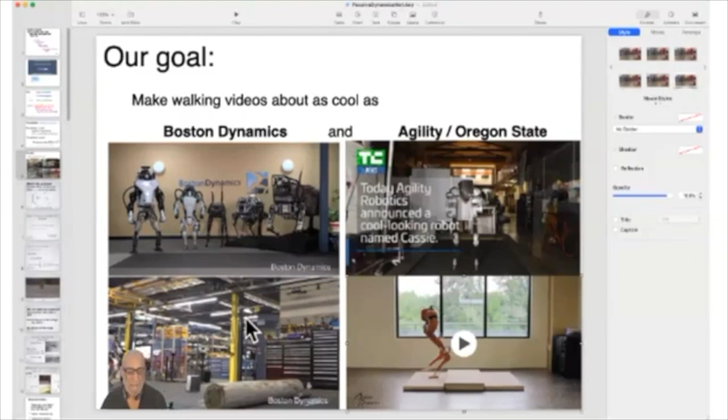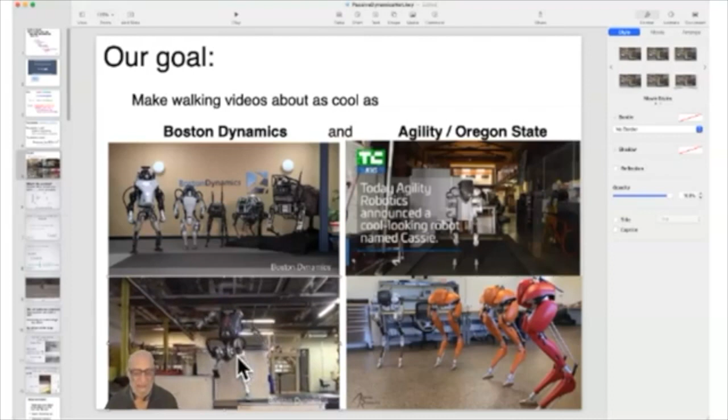Here's just another Boston Dynamics video. And I guess you could look at this and say, okay, the locomotion problem is solved, but these use so much energy, and also these tasks that take so much planning - they're kind of scripted. So we want to do better than that in some way.

And here's a way of trying to measure how we want to do: you plot on the axis how energy effective something is, which is the reciprocal of something called cost of transport. The cost of transport is how much energy you use divided by what you get - it's like the cost to benefit ratio. The cost is like gallons of gas, but if you want to be specific about energy, it's like joules of energy, and the benefit is how much weight you move, how much distance - weight times distance has units of energy. Then you take the reciprocal of that, so it's miles per gallon instead of gallons per mile.

On the other hand, if you have a measure of performance, which could be how fast it can move or how cool it looks or how much people go 'ah' when they look at it, say humans are pretty good, and the new robots from Boston Dynamics or Agility Robotics are not quite human-like, and the Cornell robots, which I'll show you, which we made, are not very good at all. So the idea is you want a really cool robot that either goes fast or looks like a human or balances really well, and you'd like a really energy effective robot. Right now, you can kind of get one or the other, and we'd like to get up here, and I'm going to tell you today about a way to get here.

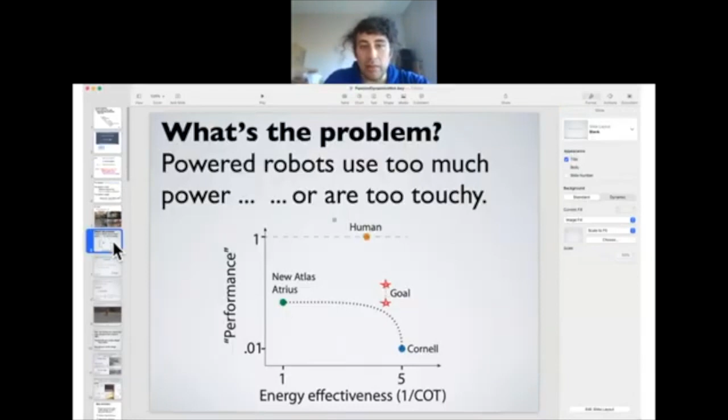I had one question on the previous slide, on the performance versus energy effectiveness, one over cost of transport. Is it true? Is it really that flat, the curve there? Is this flat up here, you mean? No, this is just a random curve. So generically, this is what's called a Pareto front, where you're trying to optimize two things, and the generic shape for a Pareto front is a circle or an ellipse.

So just think of this as, there's always a trade-off. If you have some feature and you want to make it more efficient, you have to give up something. You make a curve as good as you can in one dimension, and then if you say, no, I also want to do this, you've got to give up something on this side. So there's always a curve, and it tends to be sort of circular. The shape of the curve is actually task dependent, so depending on the task, you're gonna have a different curve. This curve in particular really has no meaning because I didn't give an objective definition of this thing called performance. I'm just trying to show there's a trade-off, and obviously humans are more capable than any robots we've made, and the robots we made at Cornell are less capable than the robots people made at other places.

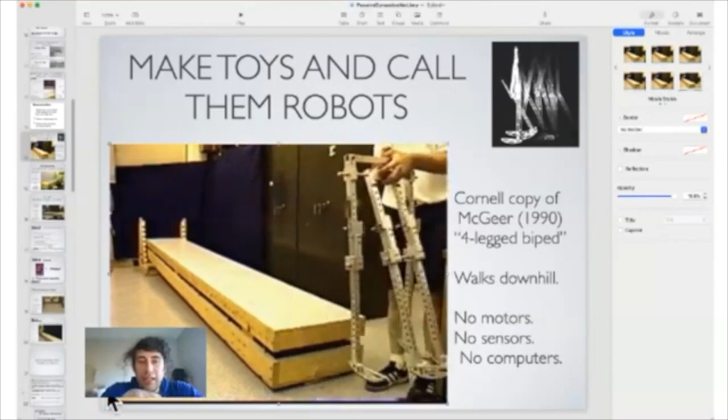So my question was, there is a bar there which connects the four legs, right? So how is that done? Is there some sort of freedom there? I don't understand how that is done.

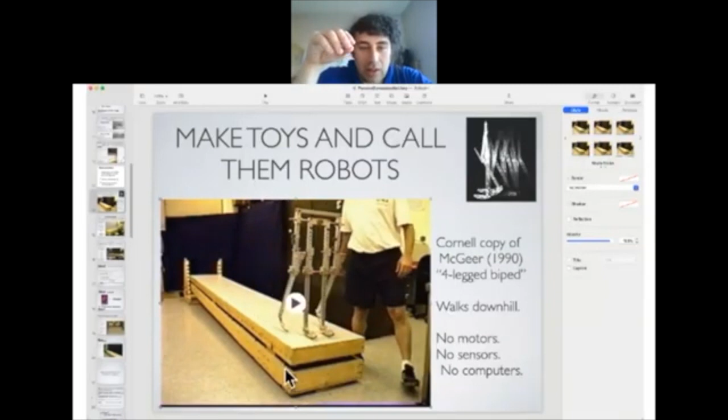Okay, so conceptually, what you're supposed to look at when you see this is two legs. You're only supposed to look at, say, the left leg and the right leg, and this leg has a thigh and a calf, and this leg has a thigh and a calf, and that's all we want. But we live in a 3-dimensional world, so if we want to take this 2-dimensional concept and put it in 3D, we have to keep it from falling over sideways.

So what happens is this thigh is just connected mechanically all the way over to this thigh. So this is one piece of metal all the way over here. So the left and right thighs have to move together. And then this is the other leg. Sorry, this is not the left and right — this is the right thigh and its mirror image, and here's the left thigh and its mirror image, and they're one piece of metal like this.

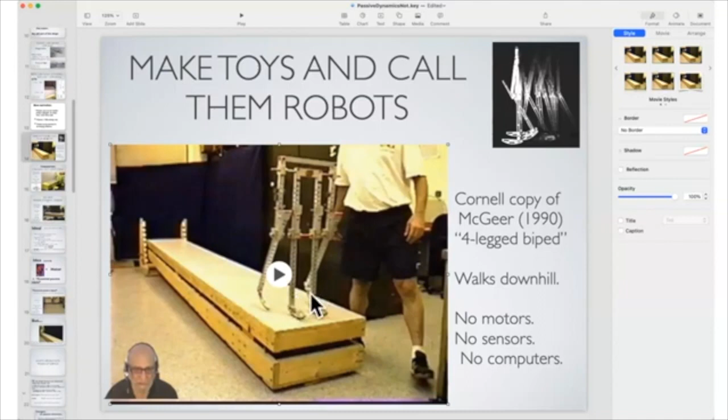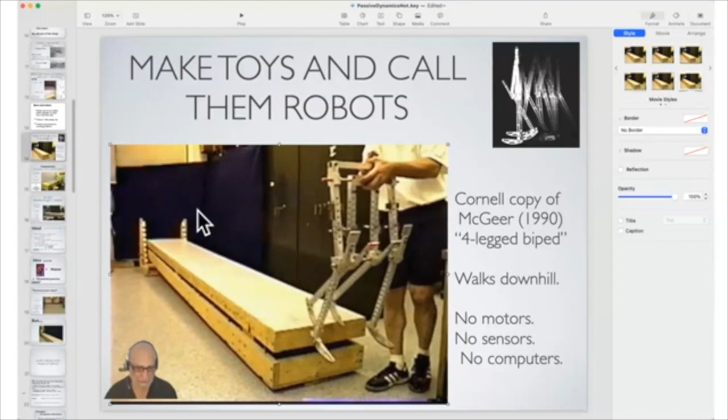Then we have the two calves, which you could think of as independent. Sometimes we would put a piece of metal across here and sometimes not. This piece of metal actually is independent of the other one, but somehow they entrain with each other because they're both seeing the same thing. So the middle two legs — these two calves are tied together. The outer ones are not, but they just entrain in the motion because of some kind of dynamics that we did not study. Does that address your question?

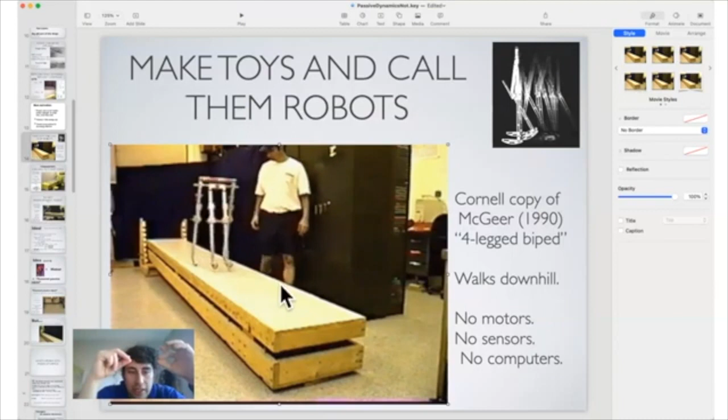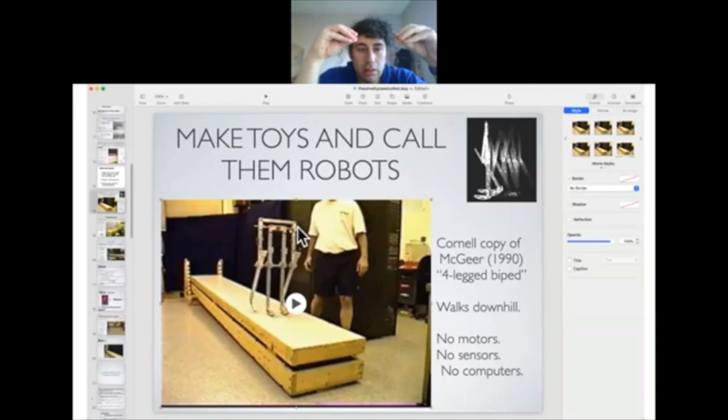Yeah, just in part. The other part is like that horizontal bar which connects the two central legs with the two external legs — is it fixed to any of the legs? This bar here? Exactly. Okay, it's only fixed to keep it from falling out. This is just a bearing. So this is free to rotate on that bearing, all of them are free to rotate on the bearing.

But actually it doesn't matter — I mean, that's equivalent to it being fixed on the outer two and the inner two swing, or fixed on the inner one and the outer one swings, or it's not fixed on any of them and it just can't slide out. So this is just a hinge, it's just an axle that passes through the four legs, but the legs can rotate — all the legs can rotate around that.

Okay, good, thank you. So now we wanted to figure out one interesting thing about this, which is this thing is stable, right? It doesn't fall down, and you'd say, well, why doesn't it fall down? One way to think of why it doesn't fall down is that once per step it visits this configuration where the legs are all spread out and it's stable. It can stand there stably. So maybe this thing inherits its dynamic stability from its static stability.

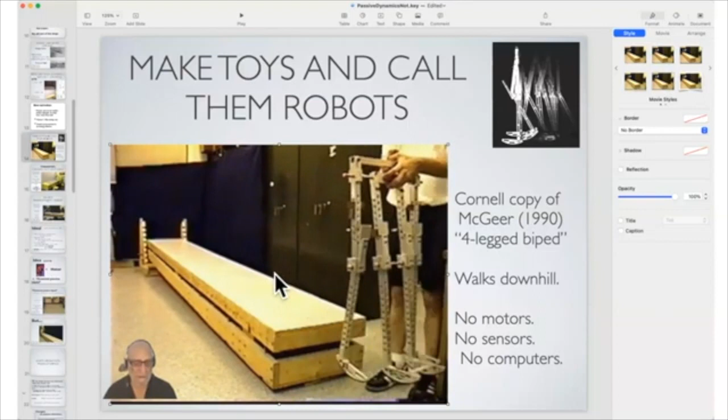So just freeze it like that — no, try to freeze it just better. It can stand like that. So, if I have any kind of object and I put it on a flat surface — say I put my computer mouse on my iPad — it's stable, right? There's no question it's not going to fall over.

Now, if I just jiggle this around and do a complete detailed analysis, this is a dynamical system. It's like a boring dynamical system, but it's a dynamical system. I could say, oh look, the equations are really complicated and it still doesn't fall over. But it's not too convincing because obviously it's not falling over. It's stable, and I don't have to change it that much.

If I take my computer speaker, the one that's not working for me, and put it up here like this, it's got this feature - can I turn off that thing that makes my background disappear? Is that in my option list? Let's see if I go to background preview. That's what I like. None - is that the hidden background? Blur - I just want to do it just the way I am. Show me the way I am. Blur. Don't want to, none. There. Should be apply. Now apply. It didn't work. Apply, didn't work. None. Apply it.

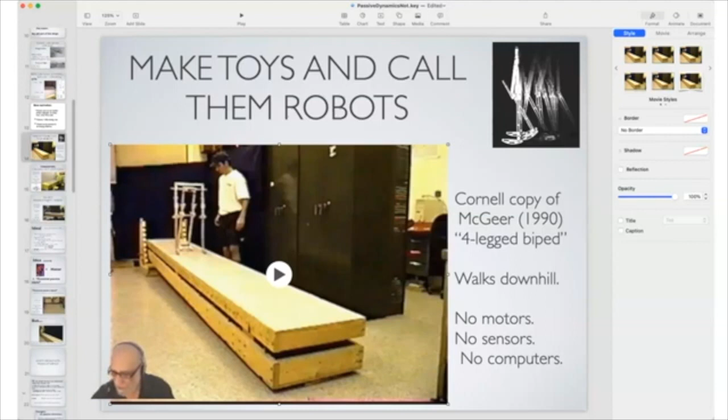Okay, so the question - are these robots, these walking robots, and what do I mean by these walking robots? I mean this one by McGeer, or this toy - are they stable because they've got big flat feet, or are they stable because they're like a bicycle and something about the motion makes them stable? It's not quite a mathematical question because it's hard to know. But we thought, well, one way we could answer that question is, can we make a robot that's like a bicycle that when it's not moving, it doesn't balance?

So here's this thing - it's got these round feet, and the center of mass is above the center of curvature of these feet. If you just put this down, it doesn't matter whether the legs are spread or not, it falls over. But it walks, and the computer agrees that it walks. So it shows in principle that this walking thing can be something like the bicycle thing. With a bicycle you try to give credit to spinning parts or so on, but there's no spinning parts here - it's only about the motion that makes it stable.

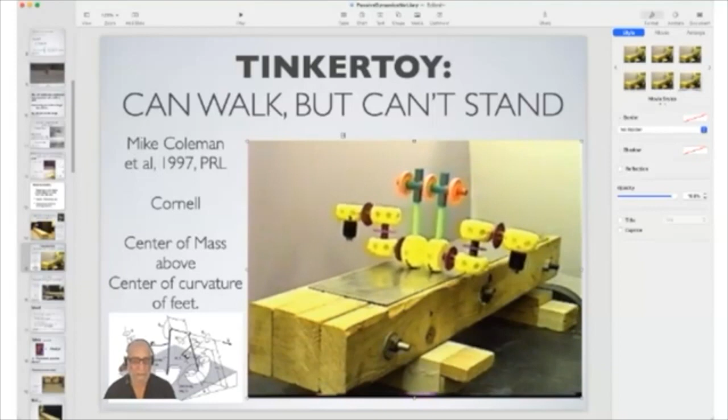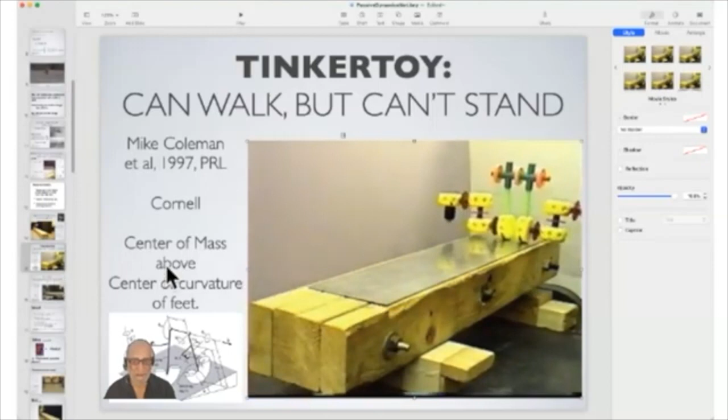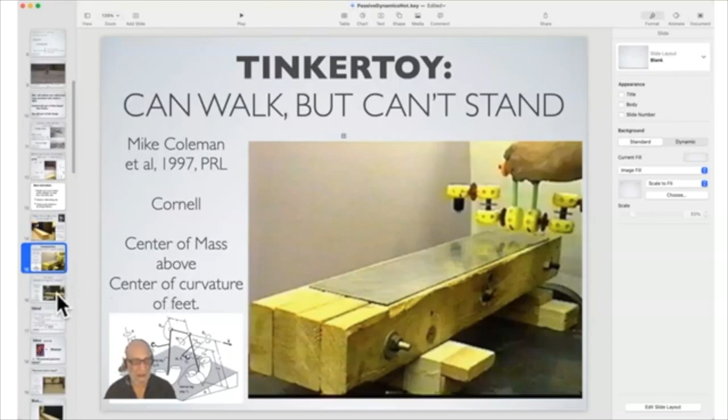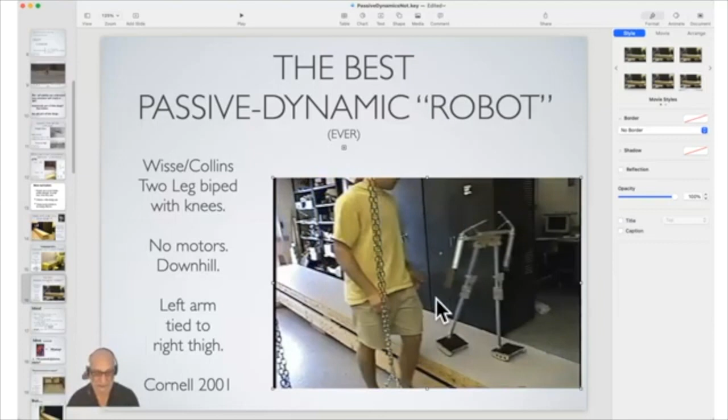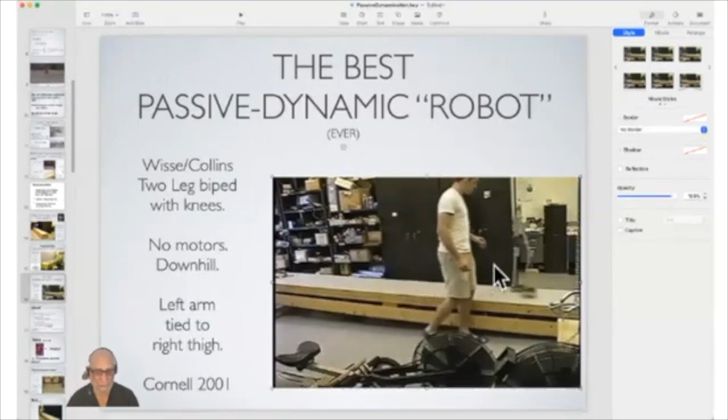So how was the shape of the feet in front? Okay, so because we wanted this to work in 3 dimensions, not 2 dimensions, you have to keep the center of pressure inside the foot, or the foot capsizes. So this actually walks back and forth, left and right, and the bottom of the feet have little curves here, and these two curves are not the same as each other. They're for the purpose of guiding the center of mass, sort of an S-shaped curve here.

And then we say, well, we don't want the heel strike to be a big problem, so there's a soft, compliant heel. So even if it doesn't land just flat, it doesn't get a funny kick to the side.

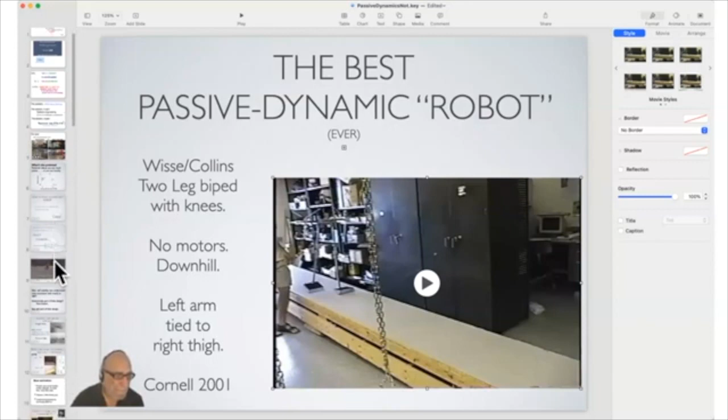And actually, we read the patent for this - let's just see if I can find it here. We've got gliders, we got toys, we've got this thing. The patent for this toy talked about the shape of the feet, and it talks about that you have to shape them so the center of mass goes like in an S-shaped curve down the ramp. Okay, does that address your question?

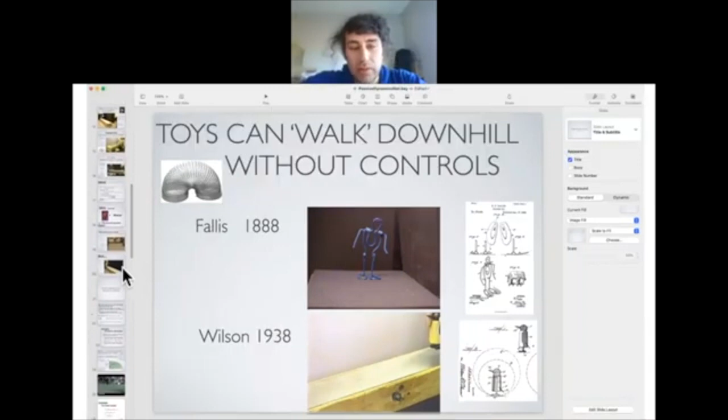The other question is: we have a lot of flexibility at the hips, well, okay, we have some flexibility at the hips, right? But these robots don't have flexibility at the hips, correct? This robot does not have flexibility at the hips. That is correct.

They only have one degree of freedom at the hips, which is a sagittal swing. They have no adduction like a sideways kick, and they have no twist about an axis. That's true for all the robots I've shown you so far, and it's true for all the robots I'm going to show you too. It's something that for 3D robots we talked about a lot, and I think that's not really essential for pretty much most of walking.

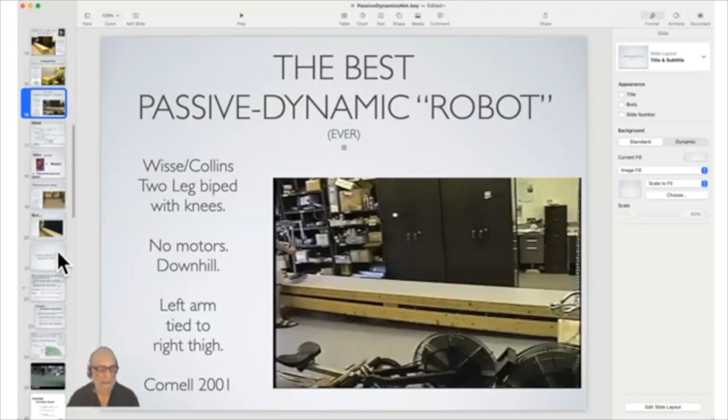Okay, so we've got this thing that works pretty well, and we say, okay, let's take an idea. This is what inspired Tad McGeer to make his first downhill robot. Let's make robots that are like planes or toys that are powered by gravity. Let's make them work. And then, since you're doing math and morphology, I can use math words and impress you, make it look like this is not just toys.

We calculate the dynamics of these things. It's hybrid dynamics with non-holonomic constraints. And we do a numerical search for limit cycles, and we find fixed points, which give us limit cycles. Then we make a Poincare map, evaluate it numerically, and get a matrix for that map, the Jacobian, and then we look at the eigenvalues of that Jacobian and try to get them all inside the unit circle. We tune the parameters until we get them inside the unit circle, and that's how we design those passive dynamic things. So there's math in there.

The people who made those original toys didn't do that math, but we did that math for McGeer's robot, and so did he. Okay, then now they're energy effective because the cost of transport is the slope in terms of our way of working.

And then if they were functioning going downhill, they should function when we add a motor, the same way the Wright brothers were. Now, how does that go? Well, to do precise mechanics reasoning, we would have to put a jet engine at the center of mass of each link. But we don't have to do it that precisely. Maybe we just have to add a little bit of energy, the same way that if you want to take a multi-degree of freedom system and bring it to a stop, you just put a dashpot anywhere and it will damp out all degrees of freedom. So maybe we just need to add a motor kind of anywhere, or kind of an okay place.

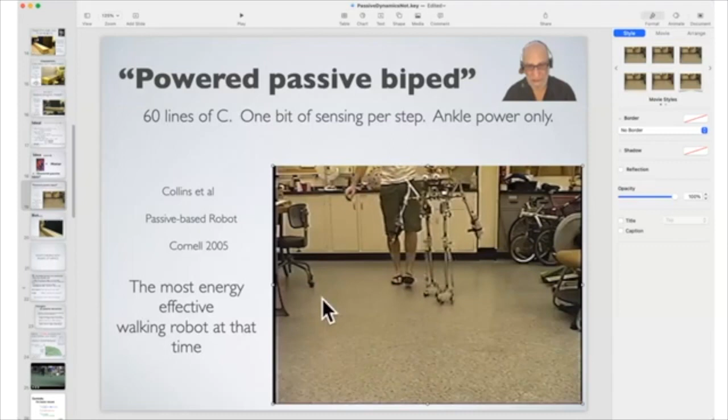It's not quite as evocative of a human gait as the passive one. The reason is that because we have to put all this hardware down here for the springs and the catch and release, the moment of inertia of the leg is bigger and the characteristic swing time is longer, so it's a little sluggish. The other one has lighter feet, it's a little more lively. But nonetheless, it's still pretty evocative of human gait, and it's basically a passive dynamic robot with a little bit of a motor in it.

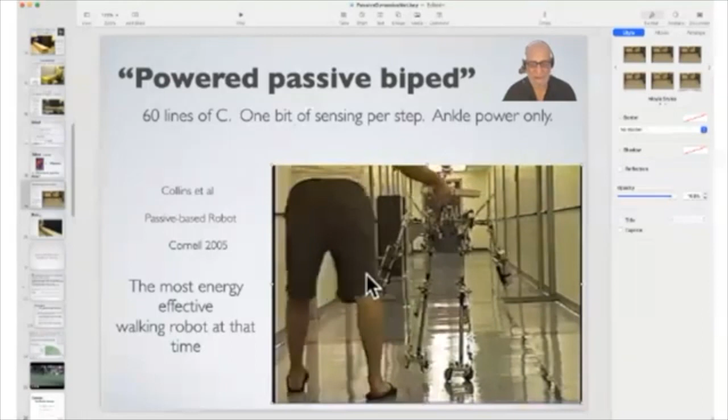So we made a big advertisement for this being a way to make robots, and I'd say we drank our own Kool-Aid, and a bunch of other people drank the Kool-Aid too.

So, do you have any questions about this robot or anything so far? Yes, please.

So how stable are these robots to perturbations? They'll move, and if you poke them in any given direction, how hard can you poke them?

Just in case anybody else is wondering, I did not pay him ahead of time to ask that question. Okay.

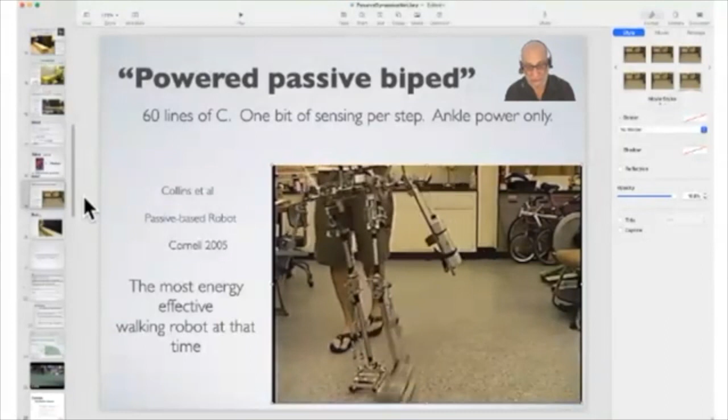So these robots are like incredibly reliable, and they work every time I show the video. Okay, but I don't show every video.

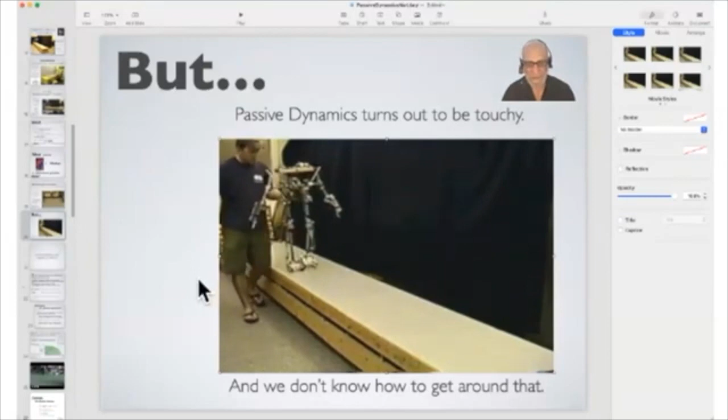So most of the videos are more like this one, maybe a little more extreme.

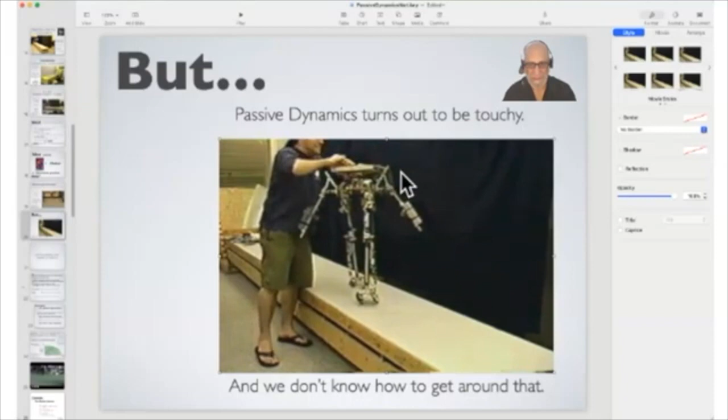This is the first time I showed this video in public. Somebody said, do you have robot videos of it falling down? And I had to look on my computer in front of everybody to search, because I didn't remember where it was. I just remembered the name of the video. You can see the smoke coming out of it over here. The name of the video was, oh fuck. I did this search in front of everybody.

So now I do the same embarrassment. I just say it. That's not spontaneous embarrassment.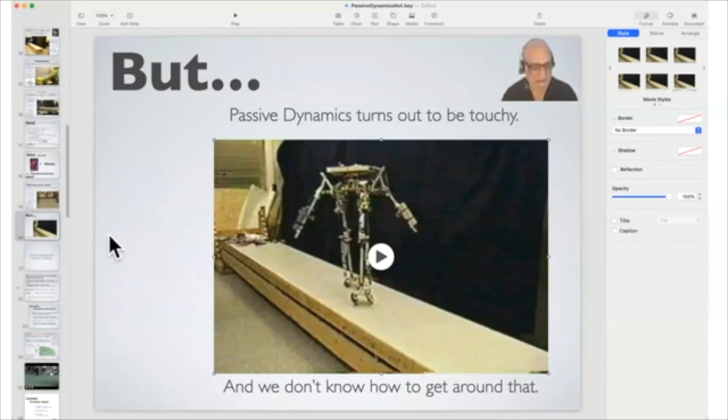So we've got hours of video of this robot falling down, and it's not very stable against perturbations. In fact, none of these robots are stable against perturbations. The bicycle's not stable against perturbations, and all the toys I showed you are not stable against perturbations. So all of these things, we get this periodic motion, and it's stable technically, meaning small perturbations die out, but the basin of attraction is not very big. We've done technical calculations on this, and I'll show a slide coming up where we quantify it.

So this was the thing. Everything was good. We were lying to ourselves and everybody else, because every single one of these robots is fussy.

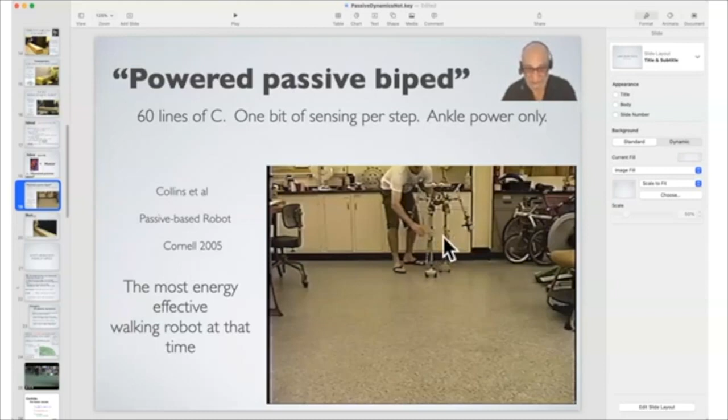This particular robot, we got in Science magazine and got lots of publicity, and I thought, okay great, they're going to have TV cameras. Steve spent a month at Cornell and he couldn't make it walk again. It never walked again after these videos I show. These are not representative videos, these are all the videos of this thing walking. And then you take any of these robots, like this one, it's really delicate. It has good days and bad days.

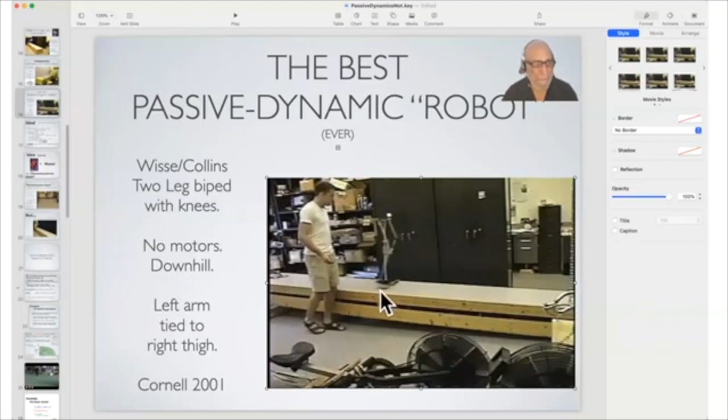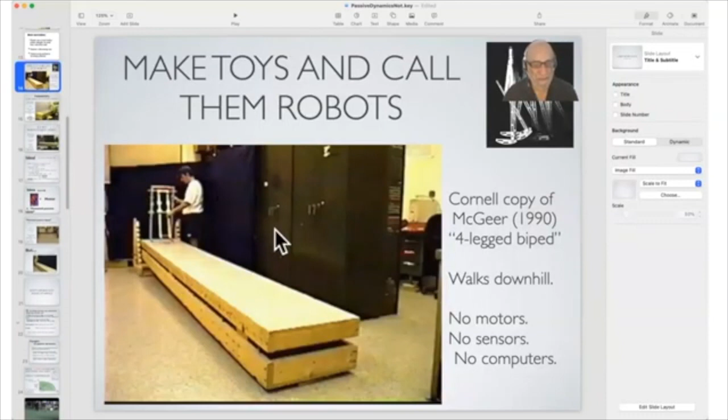This one, if you're around it for a while, you can make it walk every time. So it's a little bit robust, but it's not super robust. You have to learn how to use it.

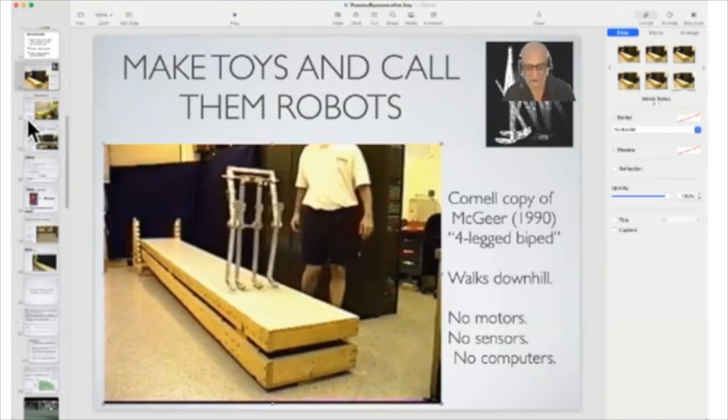This one, I've got another funny story about. This one also got some publicity, and a bunch of people saw it and saw that the research budget for this is $10 for the Tinker Toy set you can make this with. There was a bunch of 8th graders who set out to make this robot for their science project.

There's this girl who set out to make this, and it didn't work. I said, did you try adjusting the slope? Then it didn't work. I said, did you try playing with the weights here? It didn't work. Then I didn't hear from her for a while. After a few months I wrote back and asked how it worked. She said fantastic, I got first prize in the science fair. I said, first prize? Last time I talked to you it didn't work at all. She said, yeah, I never got it to work, but the judges were really impressed that I had an email correspondence with a real scientist.

So, I don't know, 5 or 10 people over the years have tried to make this, and maybe one has succeeded. It's incredibly fussy.

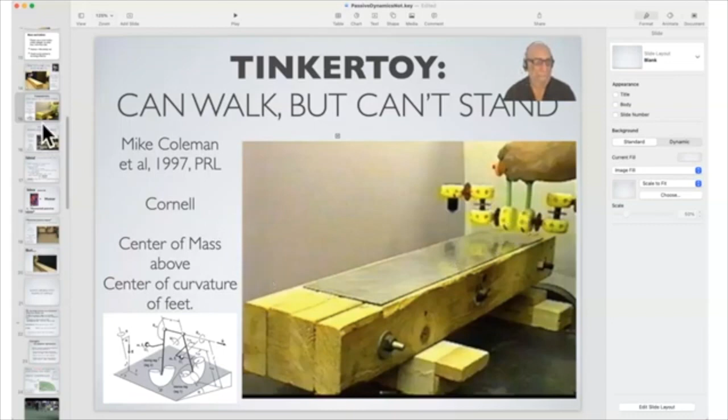These toys - this one works, but it'll typically wander off to the side. You have to have just the right slope. It's not the kind of thing most people have patience for. In the 40s and 50s you could do this, but you couldn't sell this toy really now because it's just sort of frustrating.

And then this one, as I said, it barely works. So what's the problem with passive dynamics? This whole thing I tried to sell you, which we sold pretty well - we got an article in Science Magazine saying this is a great way to make robots, and we got a lot of publicity. But there's a lot of things wrong with it.

So one thing - if you go back to the beginning and look at what the Wright brothers did, I literally misunderstood the Wright brothers in terms of the inspiration for this. Three years before their powered flight, they said the flight of the buzzard - a kind of bird that glides well - is a convincing demonstration of the value of skill and the partial needlessness of motors. So they were into gliders, but they had a different idea about them: it's possible to fly without motors, but not without knowledge and skill.

These guys were bicycle mechanics. I don't think they knew that bicycles could balance themselves - they knew you have a bicycle and you have to learn to balance it. They thought about flight the same way, that you have to learn how to balance the airplane. So when they built these gliders, they were not trying to make passively stable gliders that they'd later add motors to and get passively stable airplanes. They were trying to make airplanes that were unstable, like they thought bicycles were unstable, and then learn how to control them.

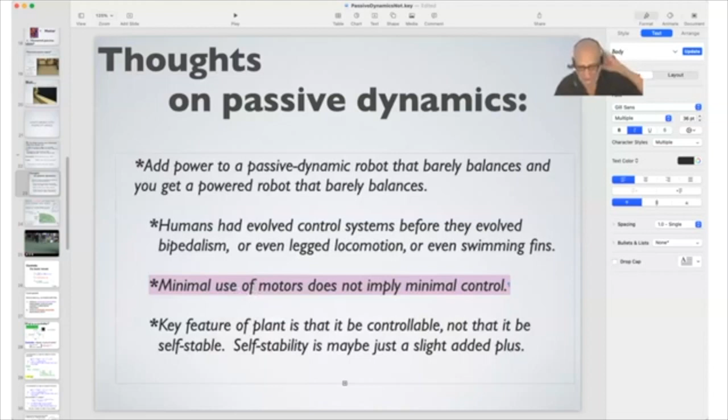It finds the way to not apply any torque.

I have a question about the mop example. So I have a weak memory of a page in a book by Arnold, which explains that in an inverted pendulum, it gets stabilized by some vertical oscillations at the bottom. I'm wondering if one can apply potentially useless oscillations at key points so that they take care of perturbations.

Okay, so first of all, my whole life is inverted pendulum. Everything I see is inverted pendulum. A bicycle's inverted pendulum, a toy is inverted pendulum, walking robots are inverted pendulum, people are inverted pendulum. Everything's inverted pendulum, so it's the right analogy. So how do you think about an inverted pendulum being balanced?

More or less, you have to get the center of mass over the support point. And how do you do that? Well, you move the support point sideways appropriately, and that's what we do on a bicycle by steering, or walking by stepping, or you somehow push the mass sideways at the top, which you can do. You have a little bit of control authority for doing that. For example, when you swing your arms, it causes a sideways reaction at your feet, which moves the center of mass sideways. And then there's this funny trick: if you shake the base up and down a lot, fast...

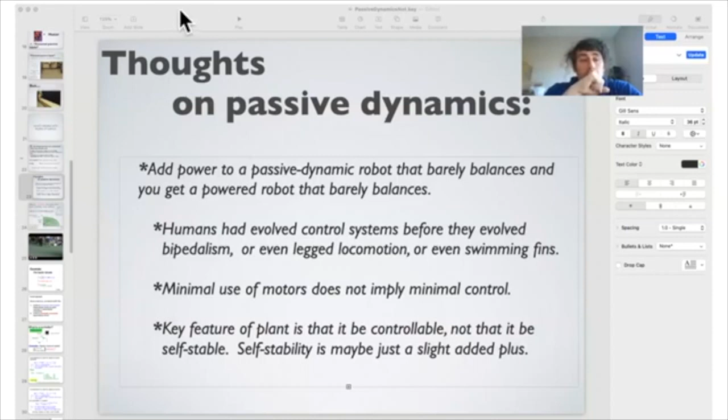Hang on, how about now? Now what do you see? Now we see a white screen, complete white. So somehow your app doesn't like my apps, even though I'm sharing the screen. I'm not sharing an application.

Okay, well you can look up 'shaken inverted pendulum' and you'll see it happens, but that depends on a downwards acceleration much bigger than g in the shaking, and in walking you can't do that because you'd leave the ground. So for the shaken inverted pendulum, if you take this thing and shake it up and down to balance it by shaking, you have to pull down with acceleration bigger than g. There has to be tension there, which there just isn't in walking. You don't have that tension, so that mechanism actually can't be part of walking.

So here's some theory that gets at this point. Here's a simple model of walking, which is a point mass and two legs. You either have this thing walk downhill and make it passive, or if you walk on level ground you give it an impulse every now and then, and control the step length. The passive version of this, which we call the simplest walker, you can investigate the stability, the basin of attraction, and so on.

We can characterize the basin of attraction by the velocity at mid-stance and the size of the next step. So we have a certain velocity mid-stance, a size of the next step, and then we let it go. What happens is we have to let it go in this blue region, a little blue region with these long fingers. If you zoom in, it's actually got a fractal shape and all kinds of weird structure. If you start it in that region, then it will just keep walking.

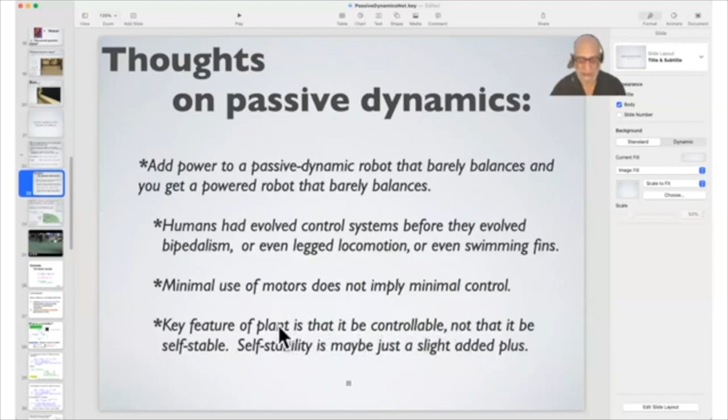So you asked the question about how stable is it? Barely. How stable could it be if we added control? This green region. So it's kind of ridiculous to start with this thing, and it's even ridiculous to say well at least it's stable to start with. Who cares if it's stable or not? The difference between this and not being stable is like nothing as far as the controller is concerned. The only thing you need from the passive system is that it's not unstable so fast that the control system can't keep up with it.

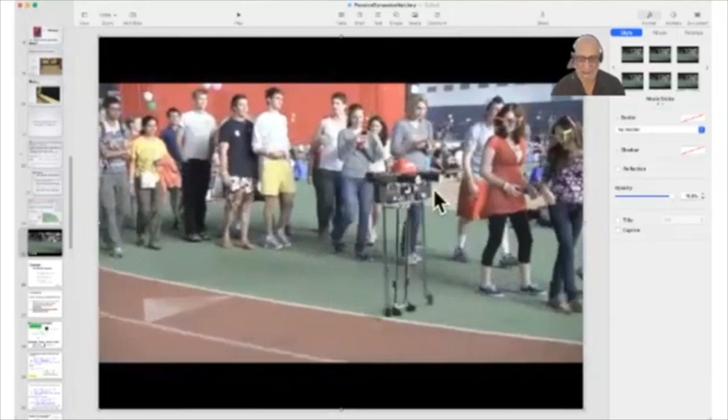Okay, so our next powered robot was much simpler, but we just wanted to get one that was really reliable and could walk a long distance. This robot looks like it's based on passive dynamics, but it's not. So unlike that Steve Collins robot with 60 lines of code, this one's got like 10,000 lines of code. And it doesn't have a $2 processor in it, it's got like a $20 processor.

The sensory feedback on the Collins walker was 1 bit per step. This one is collecting data from a gyroscope, current sensors and voltage sensors, and it's collecting not 1,000 bytes per second, but 10,000 bytes per second. The amount of data per unit time this is getting to work with is bigger than the Collins robot by factors of 10,000 or something like that.

So this is entirely powered, but it's powered in such a way that it's going to be energy efficient. The actual idea, which I think is important, is energy optimization. Energy optimization has overlap with passive dynamics, but it's not the same as passive dynamics. When this thing is energy optimized, the swing leg swings pretty naturally, but it's still controlled the whole time, it's just the control only kicks in to make corrections. This thing walked 65 kilometers on a battery charge, by far the world's record for walking robots. The whole robot used, I think, 16 watts. It's not using a lot of energy.

Okay, so the new idea is: passive dynamics was like a proxy for optimization. Actually, it's not a good proxy for optimization, and it's really not. If you go back to this model and look at how much energy it uses when it goes downhill, versus how much energy it uses when we control the push-off, it actually uses a quarter as much energy when it's powered than when it's not powered. The passive robot uses 4 times as much energy as the powered one. It's gravitational energy, but it's energy nonetheless. So being smart about where you apply the energy gives you possible energy efficiencies which you don't get if it's passive. So it's wrong to think of passive as optimized.

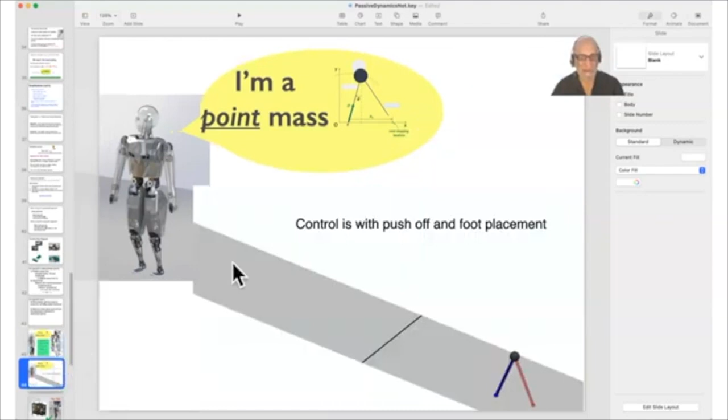Sort of one of the ideas of control is to think of the whole robot as a point mass and make a robust point mass controller, which we think we know how to do, and we think we know how to tell the robot how to act like a point mass. And then we'll get this thing to walk, except the problem is we need another $1 million, and we don't have it so far. So this project may or may not be over, depending on money we get or don't get in the next year.

The engineer who's working on this has serious health problems, and so we're fighting lack of money and lack of human life.

So that's the thing. That's basically the end of the talk. This is our target with our new optimization approach, and here's optimization with heuristics.

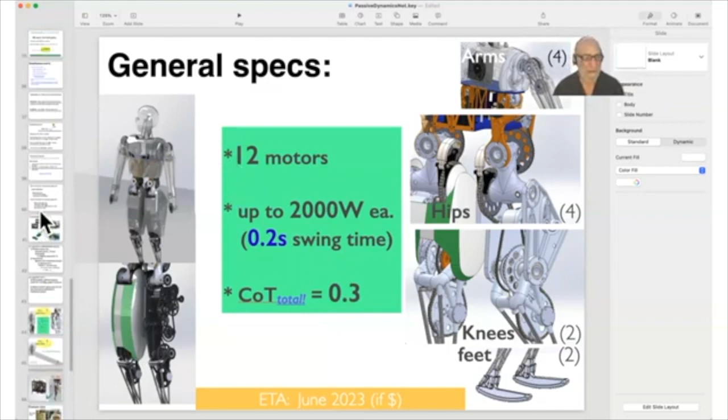And passive dynamics is a bad idea. And then even when people talk about our research, we've spent so much time on passive dynamics that when people look at this robot, they say this is an advertisement for passive dynamics. And actually, it's just totally not. We did no passive dynamic design of this at all. We have no idea if this is passively dynamic stable or not. It's designed to be motorized and controlled.

Let's get it in sight here. Okay, so now I can say my talk's over and we can do questions and then be done with it. Okay, so thanks a lot for the great presentation.

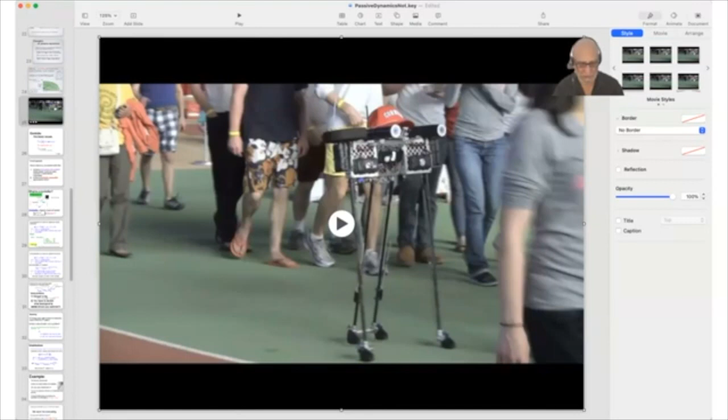Cassie, Kelsey, you're mute. You got my problems. Now you know what it's like. Kelsey's trying to unmute. Okay. You unmute Kelsey. Oh, you can't unmute. Never mind. You can mime it. I understand what you are trying to say. No, I don't. Okay.

Questions. Yes, I'll ask one. So with this particular robot... this one or the fancy new one? Exactly, this one, the one that made the epic marathon. You said it's making all these tiny control adjustments, and it's making it walk reasonably. How quick is the pace with which it has to make adjustments? Essentially, is it millisecond level, or is it sort of a couple hundred milliseconds?

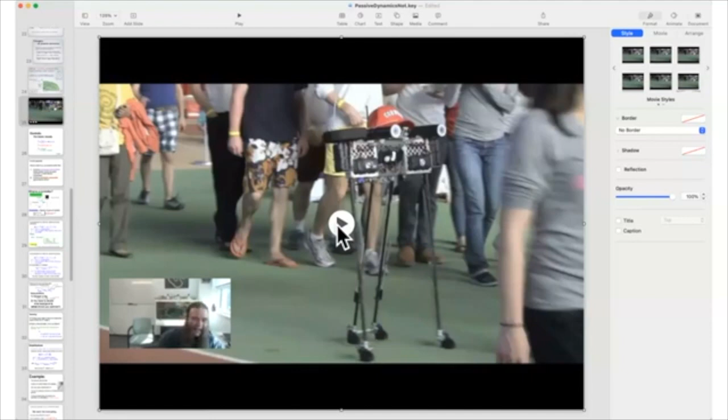I have an answer for you. Okay, so you're right in the regime of all the stuff that I think about. So the thing is, how come you don't fall over, right? Because you're taking these steps, and the thing is, what can you do to affect the relative position of the mass and the support, right? You're just trying to keep the support under the mass. And you can say, oh, it all depends on all the moving parts and swinging legs and so on, but it actually doesn't. So your ability to affect your balance is actually all packed into two instances of time. So one is, where does the foot hit the ground next? And how the foot gets there doesn't matter.

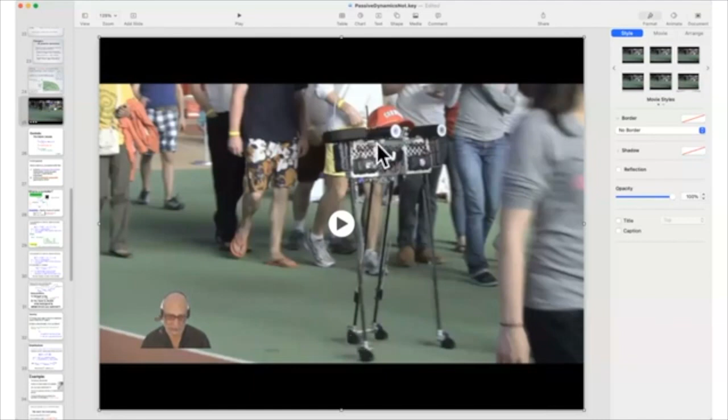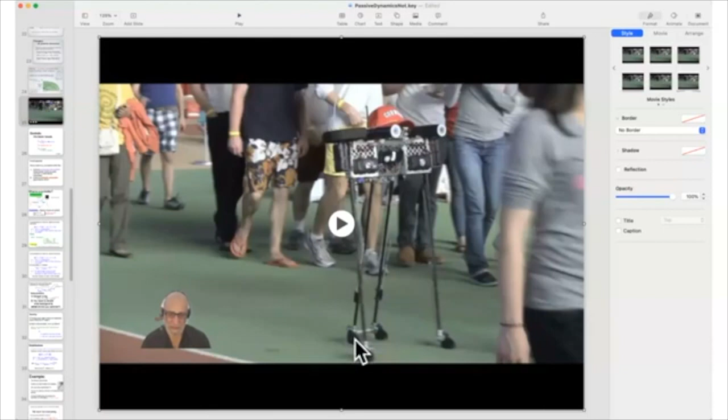Now, when I say it doesn't matter, it's a quantitative statement. How much effect you have on the relative motion of the contact point and the center of mass between steps is you can move it on the order of a centimeter. But when you take a step, you can control the relative position on the order of a meter. Okay, so there's that one instant in time, which is where you put your foot. And then there's another instant in time, the back foot, where the energy comes from is this back foot pushes off. You can watch it when it's walking. It just makes a quick little push off, and then it picks up so it can swing forward. How hard you push off affects how far the forward and backward motion.

So these are things that happen more or less at an instant, once per step - how much you need to do at the beginning of the step. Right now, this thing is about to take a step, and about half a second later, this foot's going to be up here. If you're the robot, you've got an IMU here, you've got a computer, you know whether you're on track already. So you have all that time until that foot hits next, all this time to set that controller.

The basic answer is you've got about half a second to think about what you've got to do and execute it. Now, if you wait till the last millisecond and your foot is off by 20 centimeters, you can't move it 20 centimeters in 1 millisecond. But basically, you can plan ahead. You can see whether you're on target to hit the foot. You have a long time.

Now, in the most extreme case, like we want to make a robust two-legged biped, so that if somebody comes up and gives it a really solid shove, it doesn't fall over - what do people do? People can take a step in about a fifth of a second, 0.2 to 0.3 seconds. So you need the motor power to take a step in that time, and the computer power to take the right step in that time. But it doesn't have to be all that right - it just needs to be right enough to get you more balanced after one step than before, and then you can correct further after that.

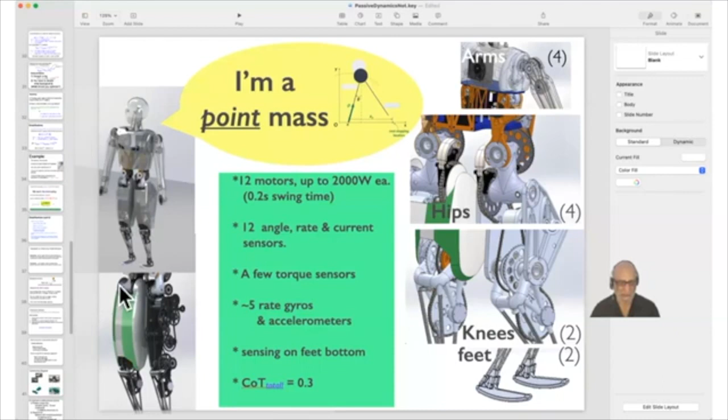They're not dimensionally the same, so you can't even really compare them, which is bigger. They're big. That picture with a very small, narrow basin of attraction - it's kind of common in all of these similar dynamical systems, right? This is a small basin of attraction, you mean? Right, yeah. Actually, that Arnold example you gave of the inverted pendulum, they have these little stability tongues, the domain of attraction is these funny little regions. But when you add control, you get rid of all those funny regions.

That maybe is an indication that the passive models are lacking something a lot actually, because in practice we don't see this complicated stability when people walk, other than if they have injuries. It's really robust. The example I like: we have these robots and we're afraid of them falling down. Imagine standing next to an American football player, or South American football, either kind - you're not afraid they're going to fall down. In fact, you try to knock them over and you can't.

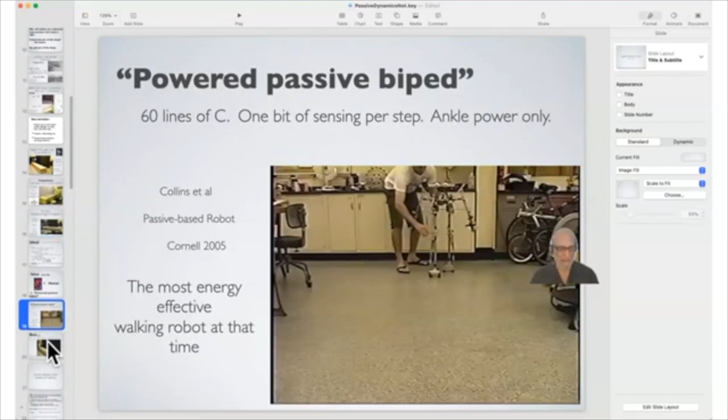Okay, let me ask one for you. Once I gave this talk and somebody said - all this passive stuff, I did this for like 20 years, right - and somebody says, oh Andy, you shouldn't feel so bad. The whole thing about controls is you have to understand the plant, and now you understand the plant. So it's good, you didn't lose anything in terms of controls, like feeling bad for me that we were barking up the wrong tree all this time. And I just don't feel like that at all. That's what it took for us to figure it out, right? It turns out that where we end up when it's all done is not that far from where everybody else is.

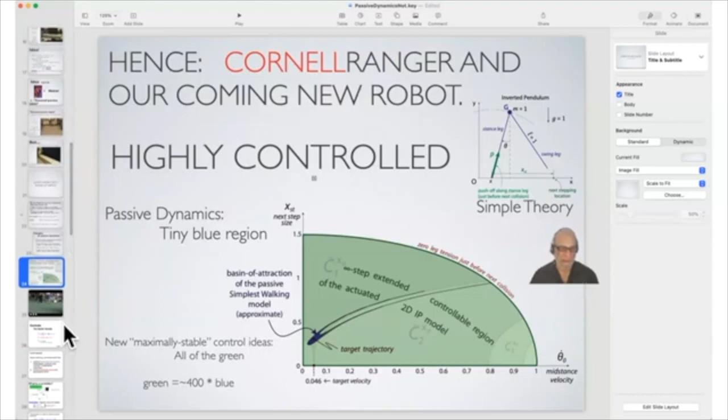Except still I think there are things that I know, like this idea that in this control there's only like these key numbers - where do you put your foot and how hard do you push off. Sounds simple, but most people don't know that. But I don't feel like, oh damn, we spent 20 years on the wrong problem. It's the way we got to understand what's going on, and we couldn't have skipped it really. That's what I think. Some people sort of like this talk because it's like admitting to a failure, but it's not even really a failure. It's just the route to where we got to where we are. The failure is not knowing how to raise the next $1 million to finish this thing - that's the failure, but the failure isn't in the research, I don't think.

Yeah. And now I ask the next question for myself. Anything else? All right, okay, that's the end. We say goodbye.

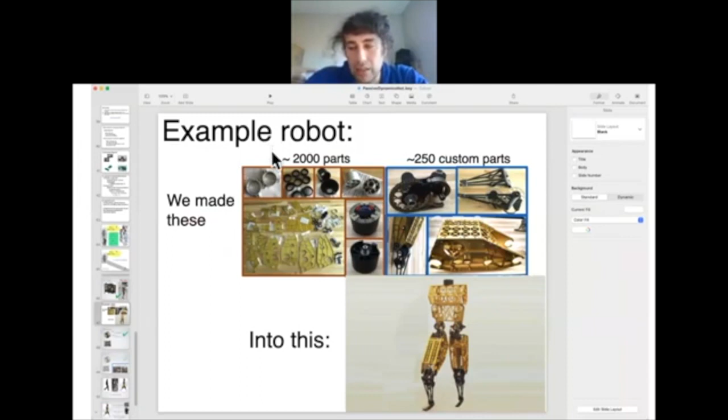No, but right now you don't see. Do you see anything? Just white. I've got a whole thing to show you right in front of you. Try to move the page you have open in one of the two monitors to the other one. I believe if you move it to the other monitor, it might show up. Okay, you see anything? No. So I selected the page, I didn't select the app. I said show my whole screen. And when I did the sharing, that's what I did anyhow.

Catherine, do you know what could be the issue there? The only thing I can say is I haven't had problems with this. When I go to share content, I have choices on the left - when I click the share button it gives me options, and it allows me to share an application or not. So now when I look at it, it says you're sharing Keynote, which is the problem. So you need to be sharing the screen first, not the app, because it just hides anything else other than the apps it's sharing. When I started I did that, and now - initially I think when you were testing things out that's what you were doing, but somehow it got switched. I don't know, let me just try right now.

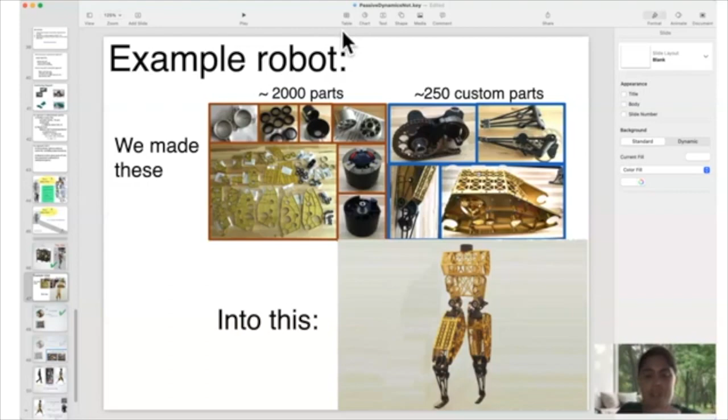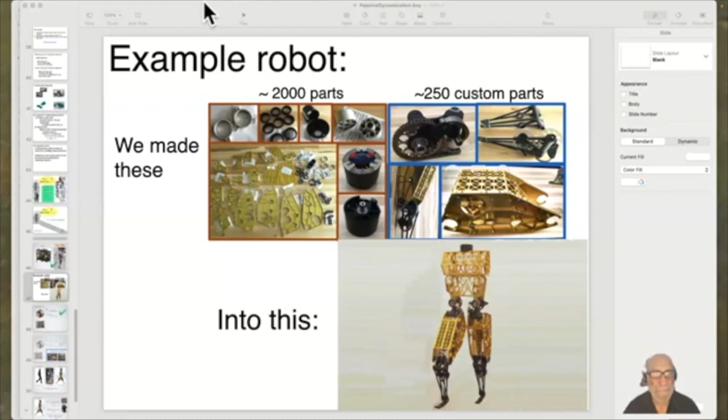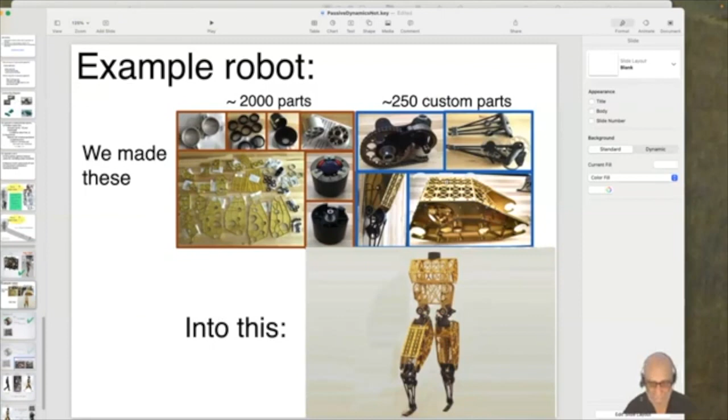I'll stop sharing and start sharing again, and go to screen two. That is right. I believe after you came back, you clicked go on. Now do you see things? Yes! Oh man, so do you want to see the videos you missed? Yes, let's see the videos. Okay, now I'll show you what you missed.

So here's the shaken inverted pendulum, and this is me - I went on the World Wide Web to find shaken inverted pendulum, and the second hit is me. So this pendulum is going up and down and balancing. Here's the experiment without the close-ups. Come on, run the experiment, man. Okay, well that's what you saw, the video of it. That's exactly it. So the reason I asked about which type of perturbations

you should be most worried about is these situations here. So what I'm saying is, did you try having these oscillations in different directions, not always in the vertical direction? I understand the problem you're describing. So what does this vertical shaking do? It effectively adds a spring that tries to center this thing. You take this whole apparatus and tip it at 30 degrees - this shaking tries to hold it at 30 degrees, but gravity disturbs it a little more than that. If you turn it upside down, it wants to point down. And if you rotate the whole machine, it tries to tip to the side a little bit. So it's not really telling you which - remember, this thing just has one degree of freedom, so the only perturbations you can do are in state or velocity. You can assign a size to them, kind of. When you shake it like crazy, with 10 times the acceleration of gravity, it's pretty stable.

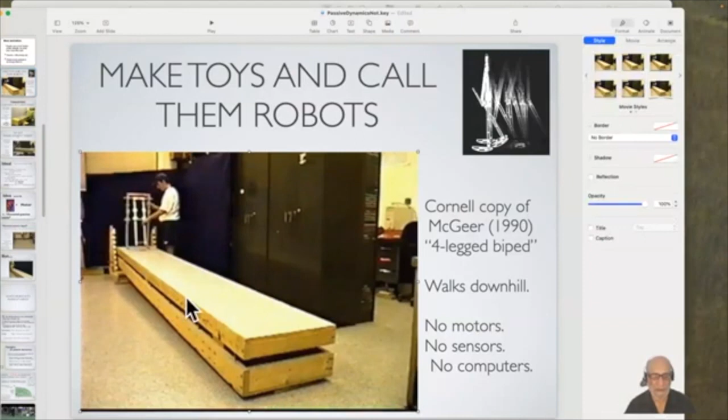Yeah, so I think I understand why that doesn't work. I'm just trying to figure out if there's a version of that which works. I think there's no passive stabilization from shaking, it's from the dynamics doing the right thing. Like the bicycle, something about the dynamics makes it so when it's falling to the right, it steers right. These passive robots, something about the dynamics is that when it's falling forwards, it takes a bigger step. You don't know exactly how or why, but it does its self-correcting actions. It's not about shaking or something like that. It's actually complex dynamics.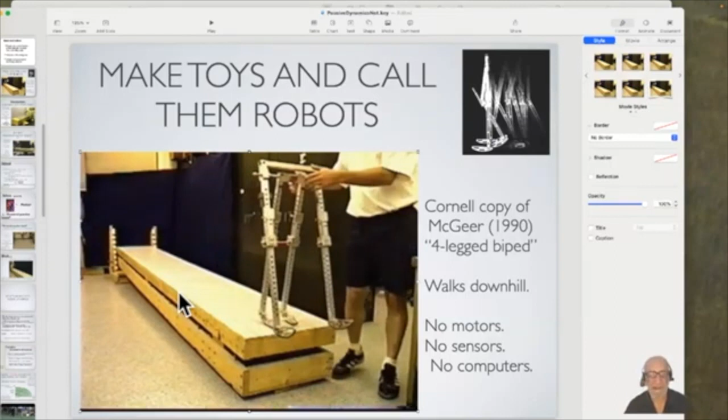So there's another thing I wanted to mention. Like when we fall down, one thing we do is tighten the core. In practice, we decide on which we do something like that. We just reduce some degrees of freedom and do something extreme. So what I'm thinking is maybe at a certain point one is to block the hip movement or something like that, and then allow for some other perturbation, some other control. Because at the end, what I do when I fall is I tighten myself, then I use some specific movement.

Okay, so that's a really good point. I've actually heard nobody make that point before, but I would say, I said that we're underactuated, and the underactuation is that without stepping, we can't apply torques with our ankles. We can only apply small torques with our ankles because otherwise the foot capsizes. But the rest of us is fully actuated, all the joints are actuated. The thing is, how can a system fail? It's got all these degrees of freedom, but you have direct control over lots of them. So I think the natural explanation for what you're saying is the essential uncontrolled degrees of freedom is the stuff you have to manage with the push off and the steps.

The whole other degrees of freedom, when there's a big disturbance, you have to manage those too. But the way you manage them is you go into position control and lock them. If you left your whole body floppy, you might take the right step, but you'd be hanging sideways some crazy way. So you do have direct control over all those, how much your trunk is bent, where your arm is, and so on. So I think it's a natural control approach to freeze as much of your body as you can. And then the part you can't freeze is the overall falling down, and that one you manage by taking a big step. That's right. And what I'm thinking is that you just avoid some nonsense things happening, some chaotic motions of the whole body.

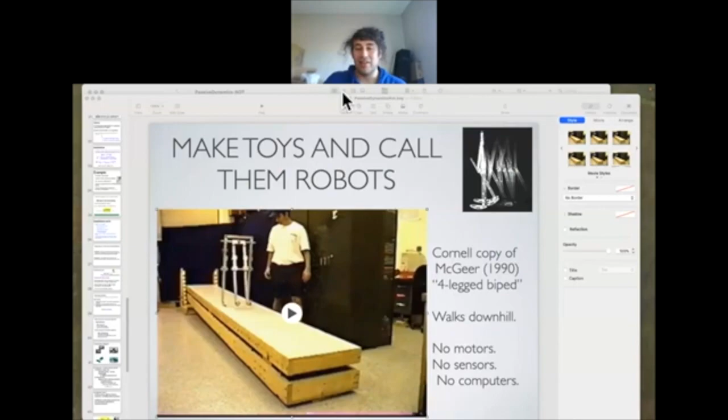As far as other things you can watch - watch Slinky on a treadmill, you can look that up yourself. Yes, I'll watch that. And watch the other one called DARPA Robotics Challenge Walking. Yes, absolutely. Okay, well thank you so much, it was a great pleasure to have you here. Thanks, bye-bye.